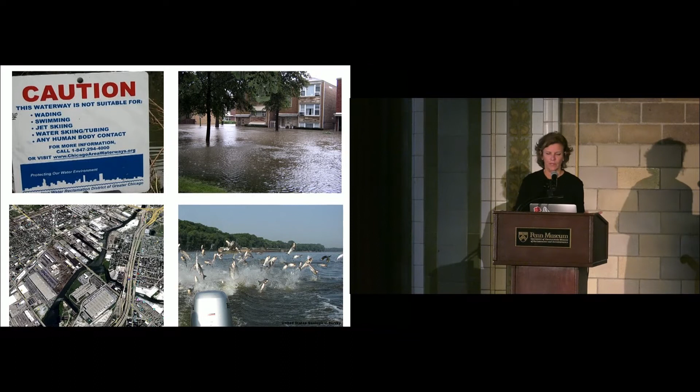So the river has a lot of issues, but it also has great potential. As you can see in the lower left, this former industrial space, privately held edges of the river, could now somehow become a place for the city to make public space or give people access to the waterways. So in Chicago, when we were doing the book, we started interviewing all the people that were using the river, even though it was polluted—people rowing, people fishing, people using it for tourism.

We decided to do a publication that would help the public understand the conditions of the river and see what the future could be if it were to change. So we took these images and, helped by talking to engineers—I think architects are very good at connecting technical information to make it understandable—we showed how the river could one day be disengaged from this reversal, and that our wastewater could be renewed and returned cleaned back to the lakes.

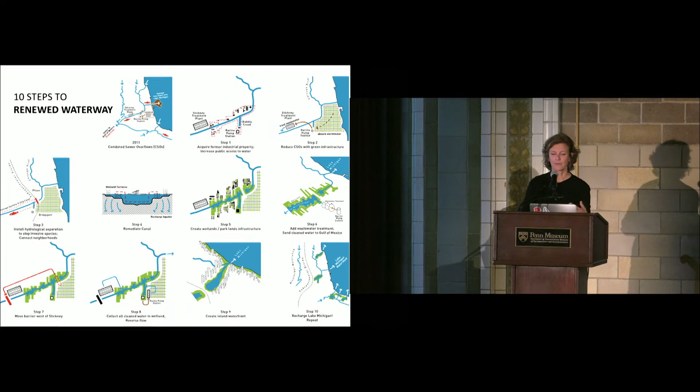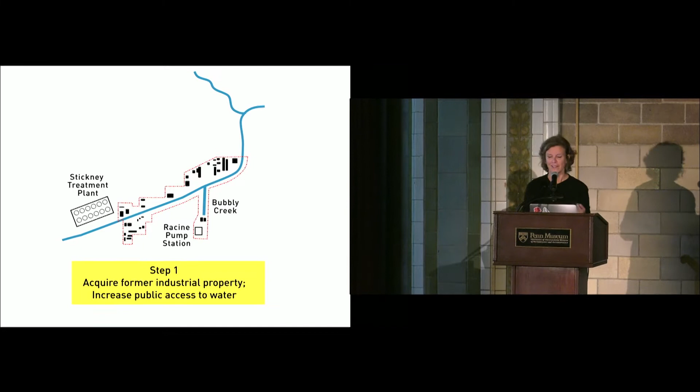In this book, there was a series of steps to follow, and step number one was for the city to get some control along this river's edge and bring it back into public use. The reason being, if people can access the river, that's the only way they are going to be able to care about it.

Sure enough, we got a new mayor in the city who took a look at this book. I think he probably heard it from other people too, but he really embraced the idea of making this river the new recreational frontier for the city. Mayor Emanuel planned 4 new boathouses along the river, and we actually got to do 2 of these boathouses.

And so what really makes me excited is seeing that this once abandoned riverfront is now really an active place for engagement and for youth in the city to be able to use it. For the architecture, it really was important for us to make something exciting, I think.

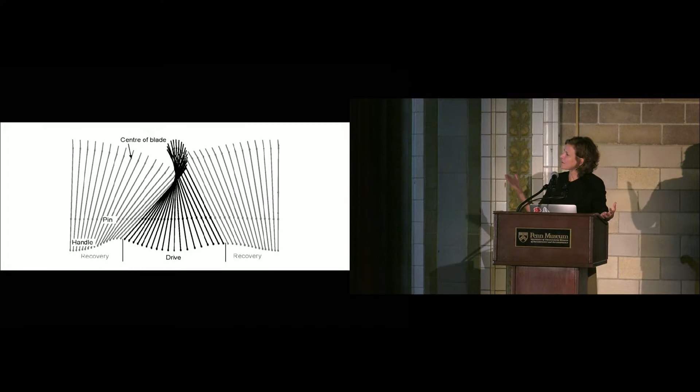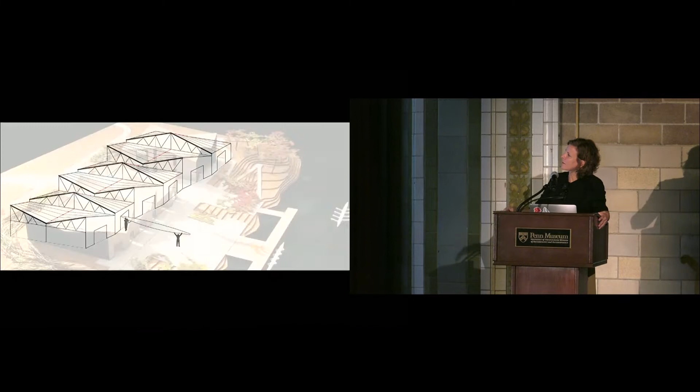We were interested in using the motion of these oars as a prompt. We looked at the whole flow of the oar and turned it into this roof form, using straight members like the oars, but creating this up and down truss system that gives you a really dynamic roof form, but also allows daylight in to warm the space.

And so it's been amazing to see this come alive and be one of the first steps. And now the city is also doing things downtown as well along the riverfront and really trying to turn it into some big asset. I think this could be happening in Philadelphia as well.

One more research trajectory, I think, along the lines of climate. Oftentimes we'll do some of this research and contribute to books. This was a book from Columbia that we were a contributing essay to. We'll come across topics that are somehow not exactly related to architecture but tangent, and then want to follow up on those things, and they kind of filter into our projects over time.

This was really about discovering the work of Marie Tharp, who was an oceanographer. She was working at Columbia, and she had this theory that the ground under the water was almost like mountainous, and at the time everybody thought that was very crazy.

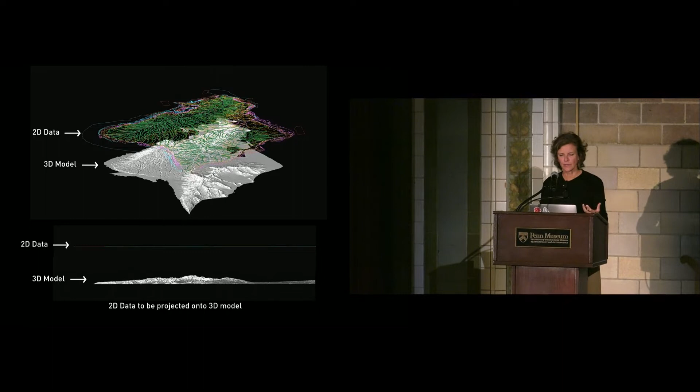One of the projects I wanted to show tonight is called the Arcus Center for Social Justice Leadership. This is a small project that's 10,000 square feet in Kalamazoo, Michigan. There's a small college campus there, and the pink dot is where the building is located.

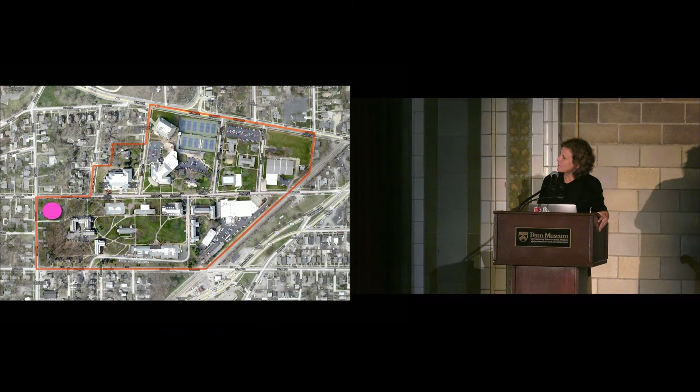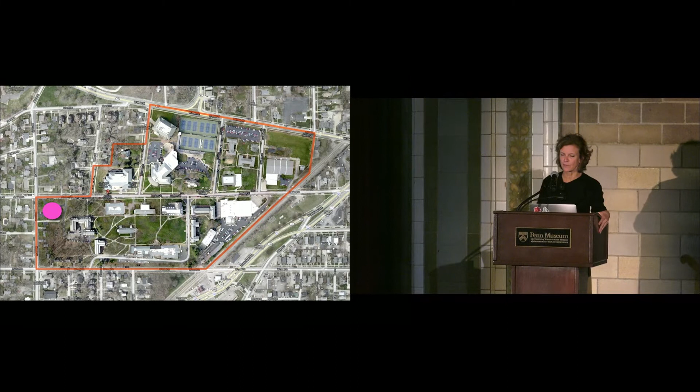They have a strong social justice leadership program on this campus, and they wanted us to design a building that could both fit into the campus but also be the first ever kind of building that's about social justice. The campus has some traditional brick buildings and some maybe postmodern brick buildings as well. But it really felt awkward to try to think about using brick in this case, given the colonial aspect of the design of these buildings, and the client really wanted something new.

Because there was no precedent for a social justice center, we just started to study the space where social justice happens in cities. And what we found was it happens in the streets and the plazas and spaces like that - demonstrations that are a result of so much planning.

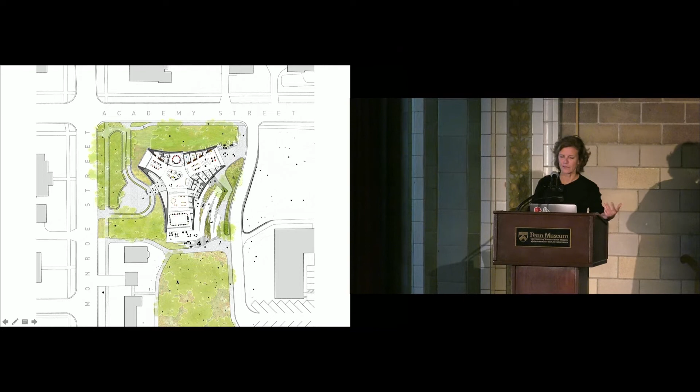And that was something that we heard from all the faculty there. They said what really breaks down boundaries is preparing food with each other, and sitting around a hearth so the neighbors can be invited in.

It really wasn't very easy to get a fireplace, a working fireplace, and a kitchen in this academic building, but because it was so central to this idea of social justice and creating these relationships, we were able to get it through. And so now the space can work for small groups and large groups. They have seminars there, conferences, and faculty spaces for work and classes.

It was really an amazing project to work on. It was fun to try to understand what it means to be a space for social justice leadership. And so we really wanted it to be light and airy, and these are all things that came out of intense research on what social justice could be.

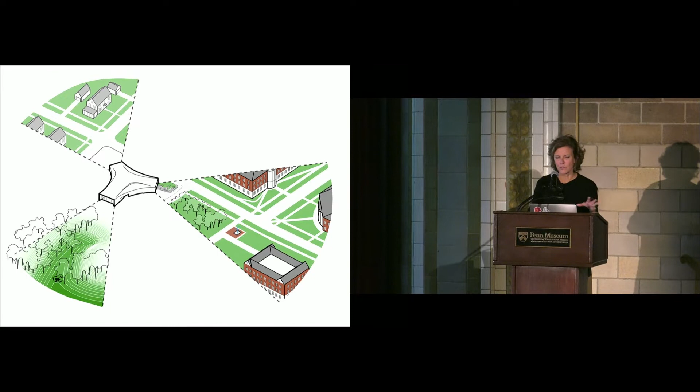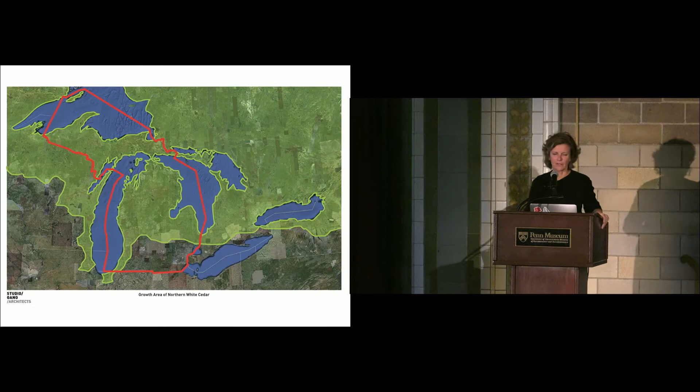These are the views out of the three ends. But one of the things that was interesting in terms of the materiality was as we were driving to Michigan for some of our trips, we came across these amazing forests that are sustainably harvested. This is a white cedar forest—they grow white cedar, which is very resistant to rot and insects.

And we stumbled upon this barn and some other buildings that were done with this incredible wood masonry—some people call it cordwood masonry. And we started to wonder, what if we could revive that technique for this building? Because it really represents this idea of coming together with neighbors to build a structure and a really strong community.

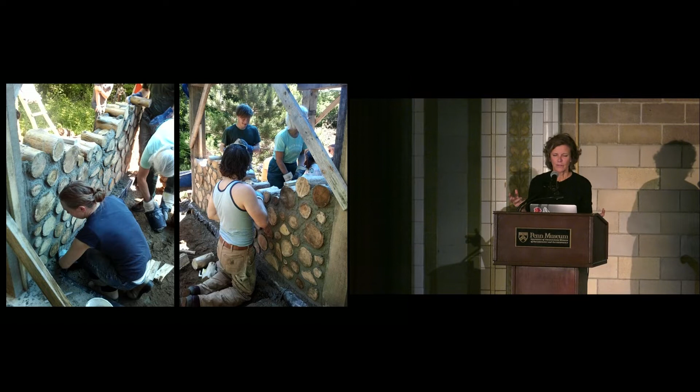Lo and behold, we found this couple, Rob Roy and Jackie Roy, who actually knew how to build saunas out of this technique. They were going around doing little workshops with people building saunas. So we asked them to come and teach us and our contractors and masons how to do a cordwood masonry wall.

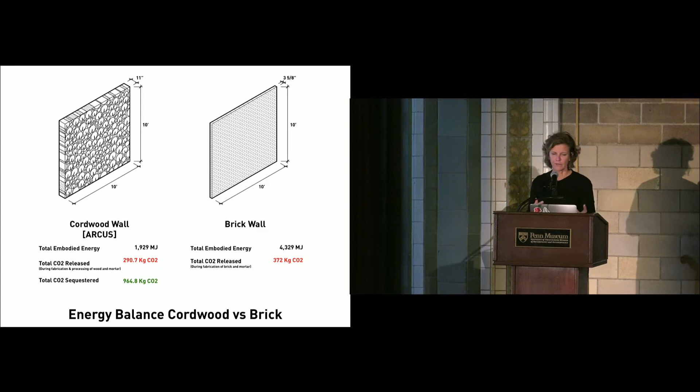The beauty of this wall is that it's really sequestering the carbon. So if you think about a tree growing up, it's absorbing carbon through its entire life. And then what you do is just dry this wood out—we actually dried the wood for a year prior to putting it into the wall. So there's very little fabrication energy put into this wood. It goes right into the wall.

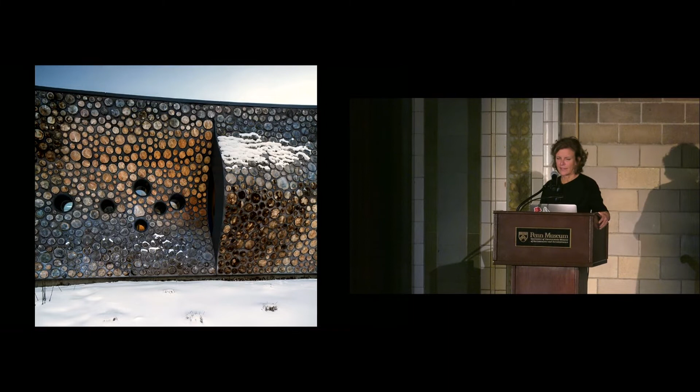Aesthetically, we tweaked it and really got it into this beautiful, almost fabric-like quality. And then you can see here, it becomes a place—it's like taking cars off the road to build a wall like this. So it's a technique that, even though it was old, felt so contemporary, something that could really help us understand how a building could be greener. And it ages too, with beautiful weathering to this material, and it really has a quality that connects it both to the brick campus, I think, but also makes something new.

And now people are really—this campus has really grown in terms of the number of events they hold for social justice leadership. They are really thriving as a school. And it's because of place, that there's a place they can gather, and it's a place that has an identity, no longer having to plan these things in the basement of a school where they used to be. So it was about creating relationships and basing the design on that.

In terms of tall buildings, they're oftentimes thought of as structures that are isolated or sometimes off-putting for community purposes. But we've been really interested in how tall buildings can also create community, because they are really the future—we need to make denser, more compact cities. So how can we encourage community on these tall buildings?

With the Aqua Tower, we were really interested in using the materials, the concrete, in a way that would give a benefit to the apartments and give terraces so people could step outside and even see their neighbor.

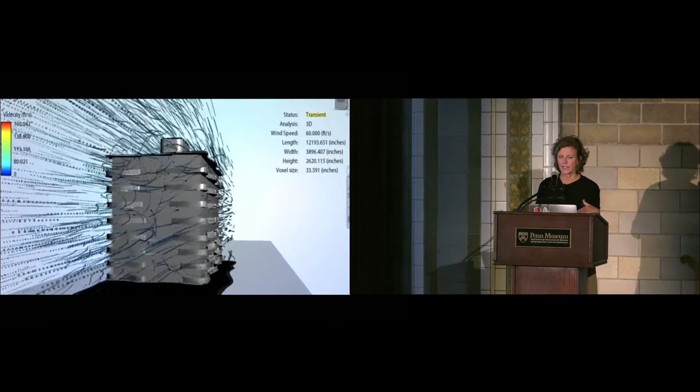We tested this in wind tunnels and found that the variations we were showing in the slabs were actually reducing the discomfort of the wind. In other words, you can use the balcony for a longer period of time in the year.

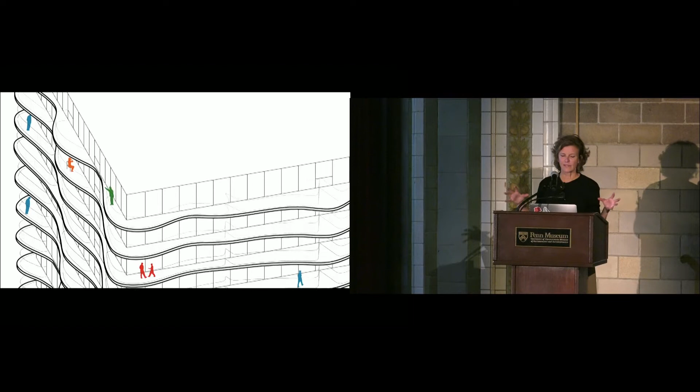It was really based on this idea of using that space outside the building for social purposes, for connecting to the environment, connecting to the neighbors, and not thinking of a tall building as just a stacked place for privacy, which was really the feedback we were originally given.

We said maybe these offsets of these balconies could also allow you to have sight lines to your neighbors. So it turns out that this building really attracts a lot of extroverts, let's just say. It's like people that want to be out in the city. There's a lot of students from the University of Chicago Business School that live there, empty nesters, people moving back into the city.

But one of the things I wanted to do better was the performance of the building. Even though it's a LEED certified building and has pretty good performance, one of the issues is how the slabs could be disengaged from the inside.

So on the next building, we tried to find ways to improve the performance and also to continue to think about the social qualities. Not everyone's an extrovert—some people are introverts—and we wanted to make a building that could be used by both kinds of people.

This building has a plan where on the north side—this is down in Hyde Park, a southern neighborhood of Chicago that has views of the skyline—you have bay windows that you can look out of, and on the south side, a really active balcony structure.

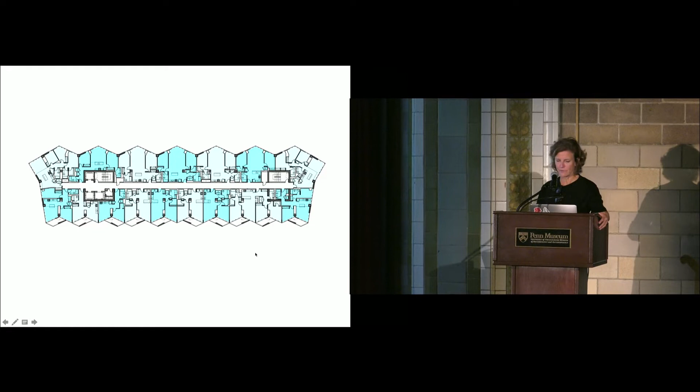So with the tall residential buildings, we've really been interested in how to make them more social. Here you can see the structure of the building.

These offset concrete panels are the columns of the building, but they also allow us to eliminate columns on these bay windows. The slab here is picked up by the panel here, but it's also hung from this panel, decreasing the span and allowing us to go column-free on the bays. The key thing is it is the structure, so it's impossible to value engineer it out.

You can see the detail of this. This building went on a site that was a former strip mall, but now it has co-working space, a Whole Foods market, retail space, and then on top of the plinth there's some social space for the building, and rental apartments above that.

From the south side, you can see these, what we call balcony stems. The idea is that they take the gravity loads all the way down to the ground, but then there's an array of these stacked, almost like cards, stacked up that create this very dynamic outdoor space. You can see in this image the loads being taken down to the ground on the green stem—that's one of the stems.

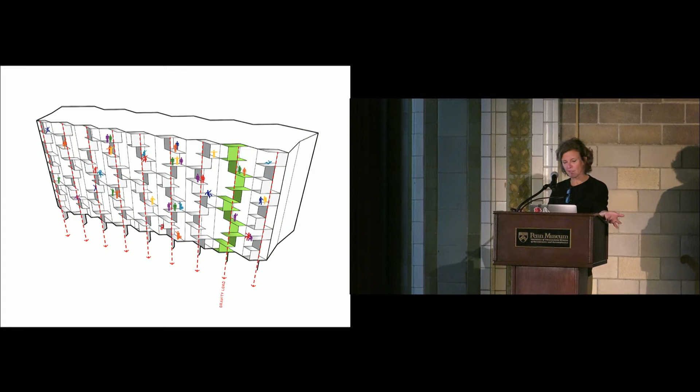What this does is it allows us to disengage the slab on the inside of the building from the slab on the outside of the building, so it can improve performance. That's what we're testing on this building. I'm not 100% convinced it improves the performance that much, but that was the concept.

You can see these incredible, almost Escher-esque spaces that are quite amazing in there. You can't look into someone else's apartment, but you can see them if they're out on the balcony. We really treated this as a kind of threshold space.

Here we're installing the thermal break, which is the first time it's ever been done in Chicago. We were really pushing for that on this project, and luckily we were able to get it installed, along with sensors so we can compare performance—it's when you have a slab inside and a slab outside, to reduce the heat loss.

On the introvert side of the building, this is what it looks like inside—those are my friends, the introverts. And then on the extrovert side, you have these three-dimensional spaces, and people can really hang out.

And you can see people here just going out to the balcony to see everyone else and be seen. It really is a pretty dynamic facade, I have to say.

But this is an ordinary building. It is not an expensive building, just regular apartments. I've always felt like architects need to put our attention somewhat on living space in the city, because it is the DNA of a city. But normally these kinds of buildings are really very basic and not very exciting.

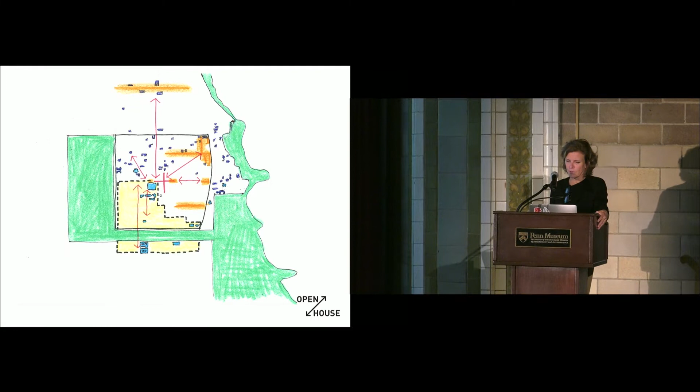And you can see the fabric. There's this beautiful collegiate Gothic fabric, but it's known for being cloistered and not super connected to the neighborhood around it. So the university wanted to change that and start to make a connection to the surrounding neighborhoods.

So we really looked at what was going on in the space and looked around at the existing architecture to find that, wow, there's already all these portals. Even Edward Larrabee Barnes' Smart Museum has them. There's modern portals and older portals, places to enter into the campus.

However, all of them had these gates on them that could be closed down. So what we proposed was a series of slender bar buildings that allowed you to walk underneath and come right into the campus North Commons on grade without any gates, inviting people in from the neighborhood and the public.

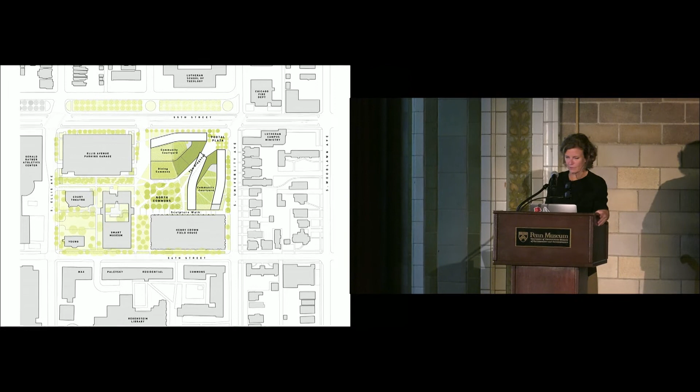And so in scale-wise, there's a big wider boulevard on the north with the tallest building, stepping down to a more residential scale.

So this is the picture of the portal and the plaza that's on the portal, and how you enter now into the campus center.

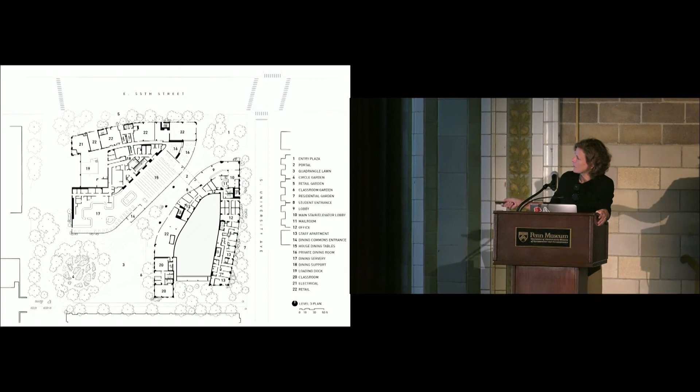And these bars create these little semi-private courtyards above, which is a garden on the second floor where students can have some space that's a little bit more private, but not gated or anything.

So it became a project about these different scales of community, everything from the dining commons itself and these courtyards to places where parents can come and visit, all the way up into these house hubs.

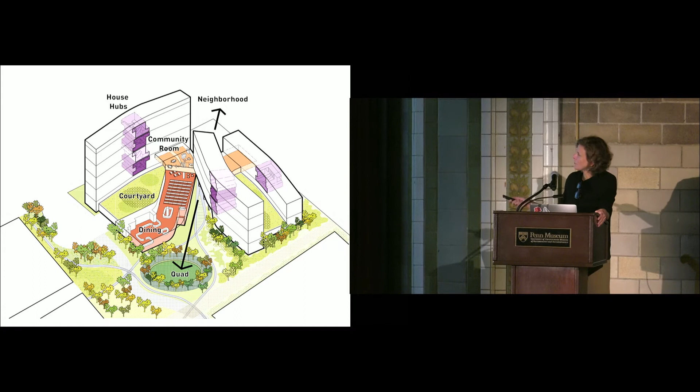This is looking at the portal as you enter into the campus and under these columns. This is the dining commons, which is really almost like Harry Potter-esque with these long tables. But it's also a place that everyone can come and eat.

So people from the neighborhood could come in, the people who work there can eat there, and they do. It's a really beautiful light-filled space with these grill screens that help shade from the sun.

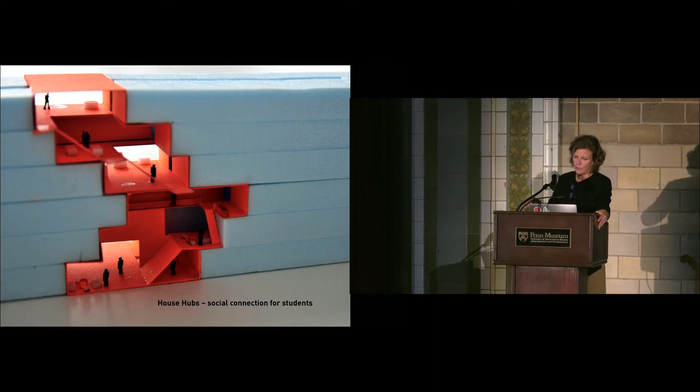So everybody comes in to one entrance for this project, 800 students, and they can either take the elevator or go up the stairs, and then communicate across to any of the towers. But the DNA of the project is really about this house hub idea.

This is the house, showing two house hubs. The idea was there's got to be a space where these 100 students, the university system of 100 students, can get together and create these social relationships. So we created this staggered section, so you have sight lines between 3 levels.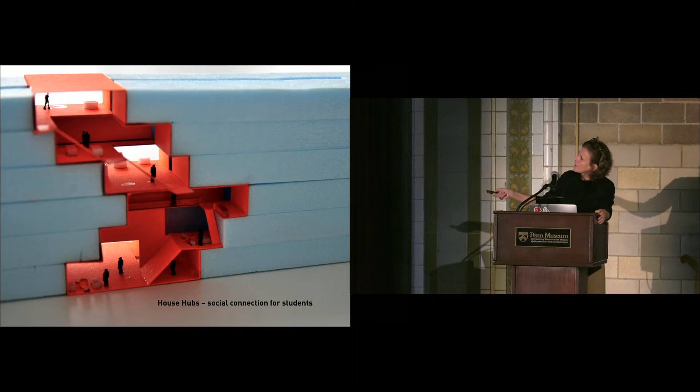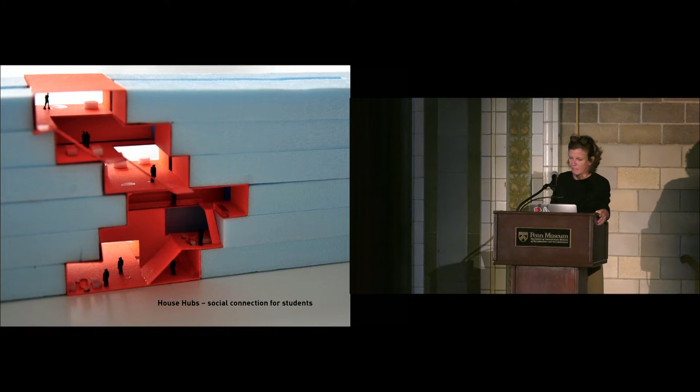It's almost like a townhouse inserted into the fabric of the tower. And that place is where everyone from that house can gather, have study rooms, and cook together.

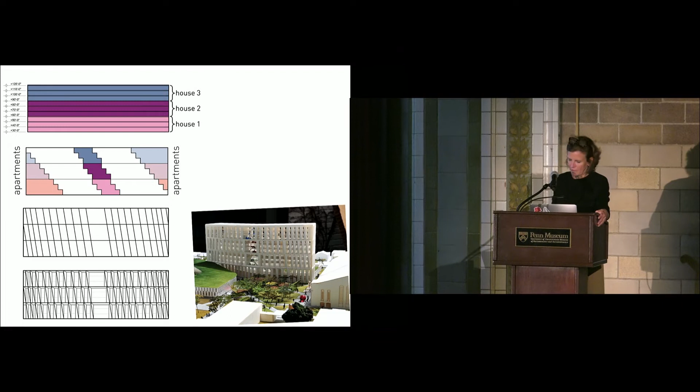And that patterning ended up migrating and informing the facades of the buildings. This is an early model, the model from the competition, and here's another model. And now today, this is the space. Of course, it's really clean because we took the pictures on day one and they had to move in on day two.

Hopefully they have already taken over the space and really made it their own, so each one has a little bit different character.

That will allow people to gather together and bond over the years. We had the idea that the performance for this building is really to have a window that can open 100% and get 100% fresh air in the space. So the grill acts as a safety protection, but it allows you to open all the way up.

We tune the facades based on the orientation. It's really interesting because there's no ductwork here, we're doing a radiant system. It's really energy efficient, and all the students can compete from the different houses on how to reduce energy.

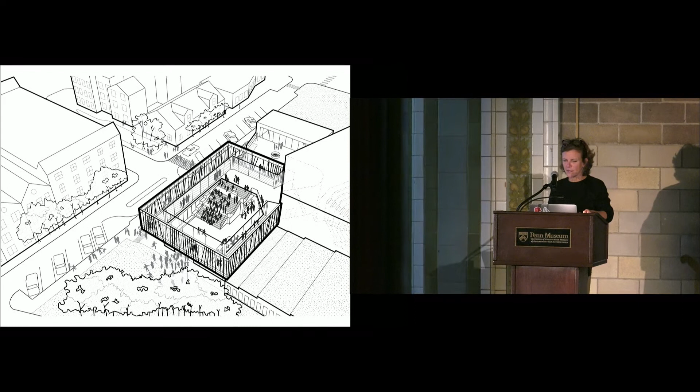So there was some worry about putting a modern structure into Glencoe, but because we landed on this idea of the connection between wood and theater, we were able to convince our client and our community that a space surrounded by wood and plaster would actually be in keeping. So we wanted to use wood in a really new way.

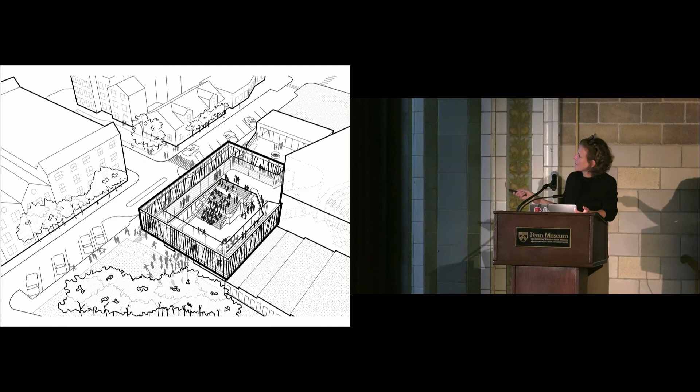We created two venues, and then the lobby is actually almost like this third venue where, after the theater, you can go hang out and talk about what you saw.

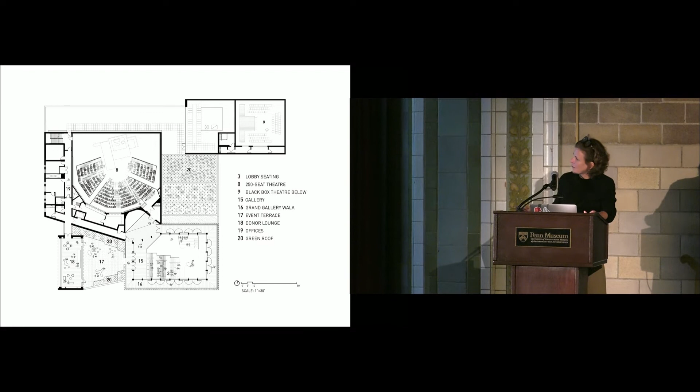So in plan, it's this thrust stage, black box, rehearsal space, and then this lobby that doubles as a community meeting space, a performance space, really serves a lot of different purposes. On the second level, there's a walkabout, similar to what we saw in the inn-yard theaters.

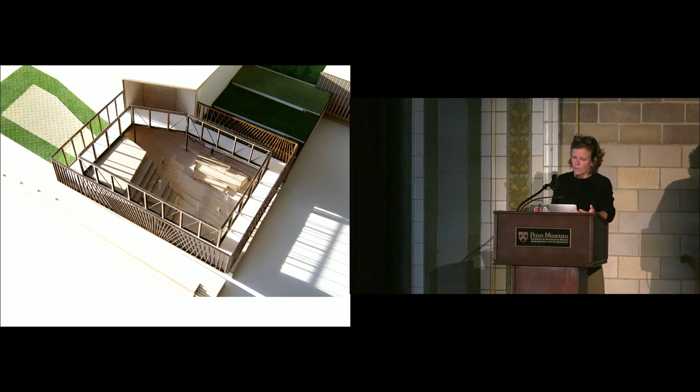Here's some more research about wood construction, and as we moved through the design process, we really wanted to push the limits of new ways of using timber, either in laminated form, but here in tension. Tension makes things thin and light, and it's a beautiful thing to see a structure in tension.

So what happens is these Vierendeel trusses and the wood spanning over the top then hang down, and the idea was to hang this walkway around.

At this point, I realized that the engineer I had was specialized in concrete, and I really needed a wood engineer. And so it just was an incredible way of finding the ecology of the team as well, like who could work together with each other to solve this problem.

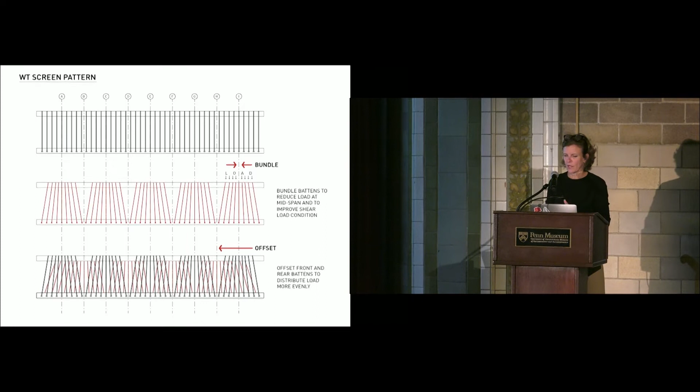Wood was not allowed to be used in this way for the structure, and so we needed to show that it could be done. This is a detail at the bottom we call the cat's paw, and it's a brilliant way of holding in tension. You can see this cavity, adding wood into the strand, the batten of wood to give it more mass instead of putting a bolt through it, which would take away mass.

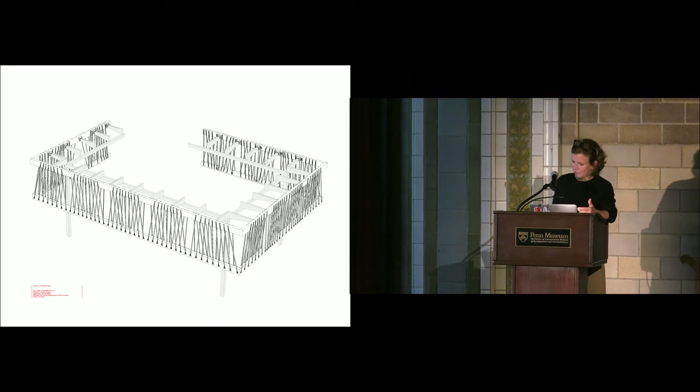We also had to find the people that could do this. I mean, it's not the usual kind of work that you would get from a carpentry shop these days. And we discovered this guild out in the middle of Illinois called Trillium Dell, and this is their site. Some of the work that they do is to disassemble barns and to salvage the wood, and they're really brilliant, a very international group located out here.

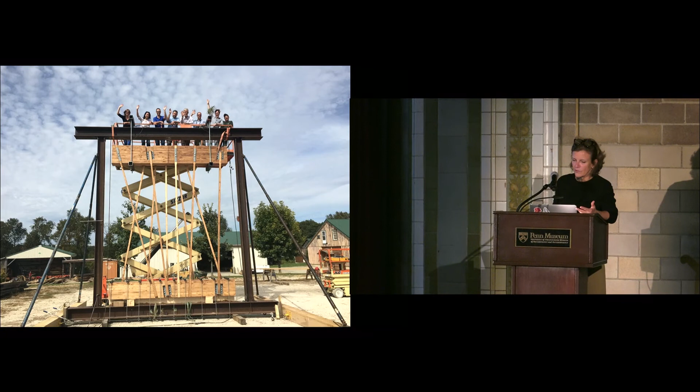And they helped us to mock up and test. So this was like a rig to pull these battens apart, and we were able to show that it could do what it needed to do, and passed the test and was approved to use it in Glencoe. That's the lightweight engineer, Peter Heppel, there, and our team on the rig. The good thing was the wood never broke, and then the rig started to almost break, so we stopped the test at that point.

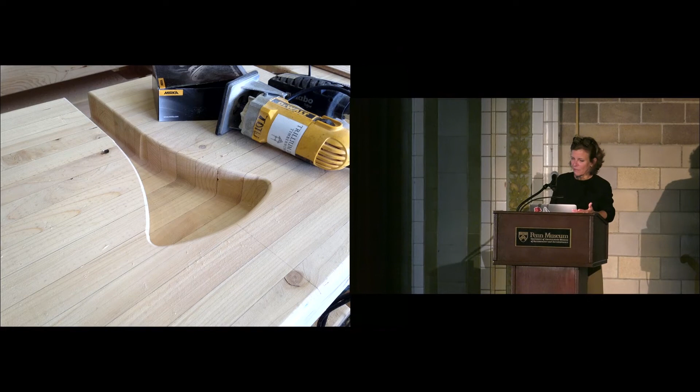Here is the way that the glue laminated wood are routed out to accept the cat's paw, and this shows putting the wood into the cat's paw, into this mold, the flare, which ends up like this. I learned a lot too, and they let us make some of these things, which is really cool to be an architect and be able to participate a bit.

I also learned how to throw an axe when I was out there, because that's what you do for fun in the middle of Illinois in the middle of the winter.

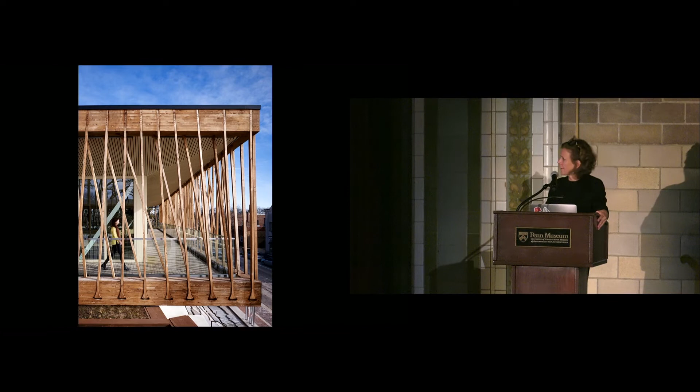Then it started to come together, and you can see the cat's paws coming in, and how this is attached at the top. This had to be straight so you could get the piece in, and you could see and just feel the hanging of this walkway that gives the theater its identity.

Here you can see the other benefit of having the Vierendeels and so on is just how light this all is. There's no additional structure needed because this is all hanging from the top.

So we have these doors that can open up onto the park, and hopefully sometime in the future, the artistic director will be able to do one of those parades, the pageantry that starts in the city and ends up inside.

We used a lot of the wood that was on the site. We did mill that and use that for the interiors. This is the lobby space that you can see, and here it is with the doors open.

We also made sure this space was usable for performance, so it has lighting and is acoustically treated, etc.

And then across from the walkway, there's a kind of meeting space where the ladies' library club can still meet, and there's a rehearsal space, and then this is the thrust stage with the brick that was on the former building on the site, reused to create an acoustic wall with this pattern.

And that was a whole other story that I won't get into, with the masons who didn't think they could do it, and they did it, and they were so excited.

So, the rest I'm going to show just quickly a few projects, not too in depth, but just some of the ways that we're trying to think about each project.

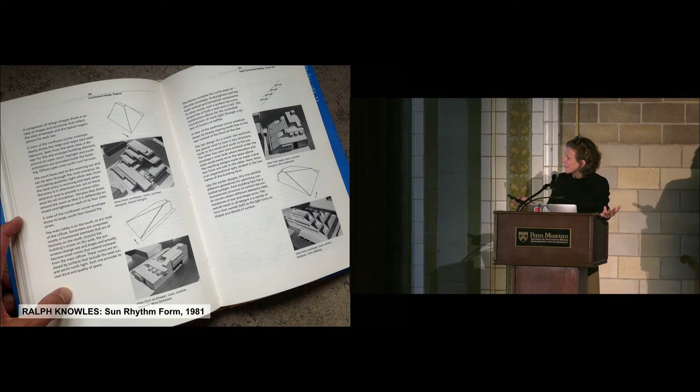Different scales, different programs, and this one is the research for a solar-carved building we're currently under construction in New York. When I was in grad school, I came across this book by Ralph Knowles, who was a professor at USC. I didn't have a connection to him, but I thought the book was fascinating. He talked about how you could shape buildings to make the space around them more comfortable for the neighbors, almost like a solar zoning code that would help shape cities. I just thought it was fascinating.

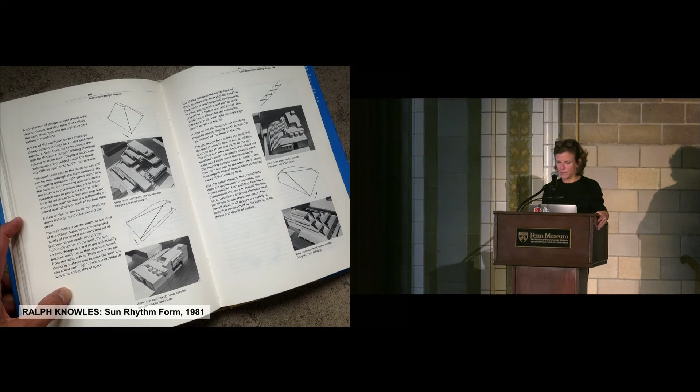I ended up going to a conference, made an appointment, and met with him to talk about this concept. I always had it in the back of my mind, and then we came across this project in New York, and it seemed to apply.

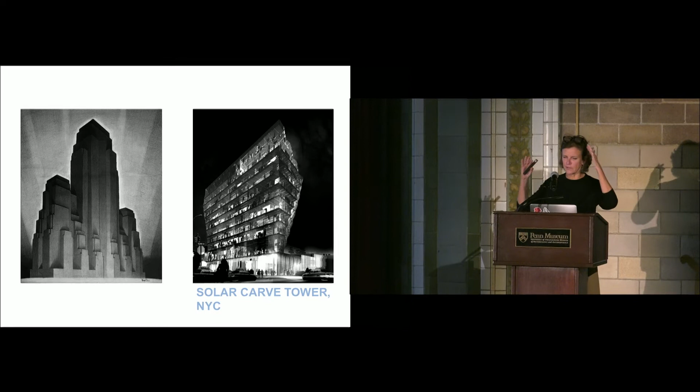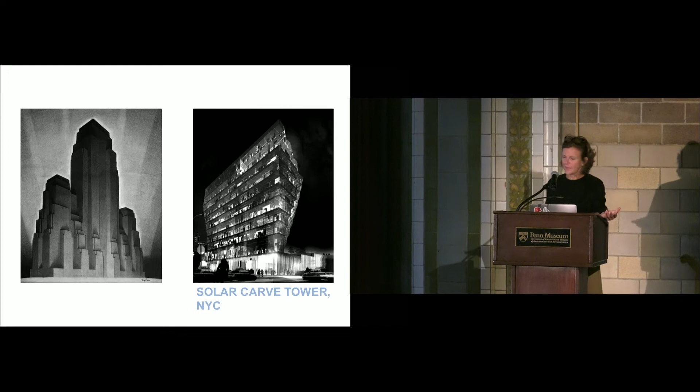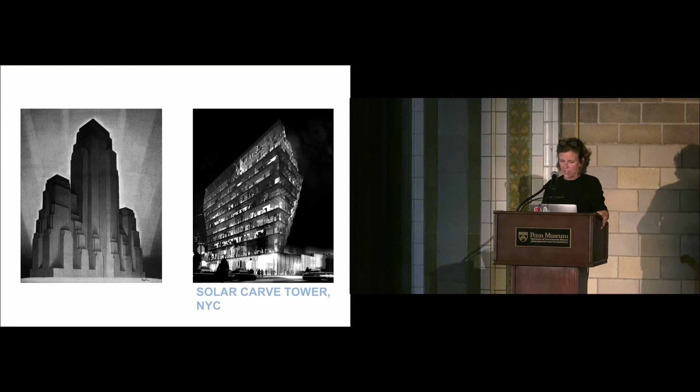This is a 1916 zoning ordinance in New York that determined all buildings would be these step-back skyscrapers. The whole purpose was to preserve light and air to the public space and street, which is really great. This is our building, which when you look at it, you might think looks the opposite of solar-carved, but it's actually designed specifically for its place to benefit the space around it.

In the New York code, you get this zoning envelope, which I'm sure you've seen before, and it produces a certain footprint. Our site happens to be along the High Line, this green line here. This is the Standard Hotel, and it's along the Hudson River in Manhattan.

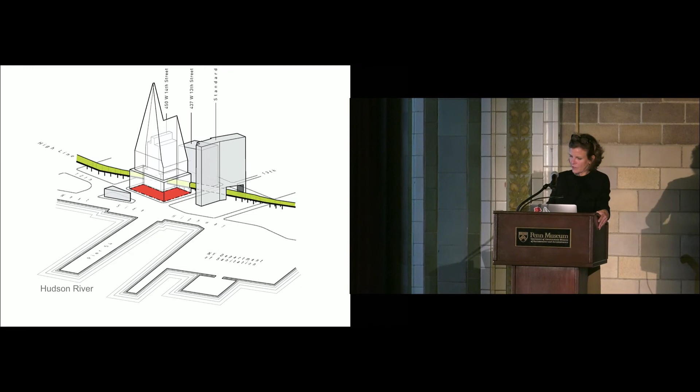If we built as of right, we would be able to do this L shape, and it would really crowd out the High Line, which is interesting because, in fact, it is a public space, but it's unusual because it's in the middle of the block.

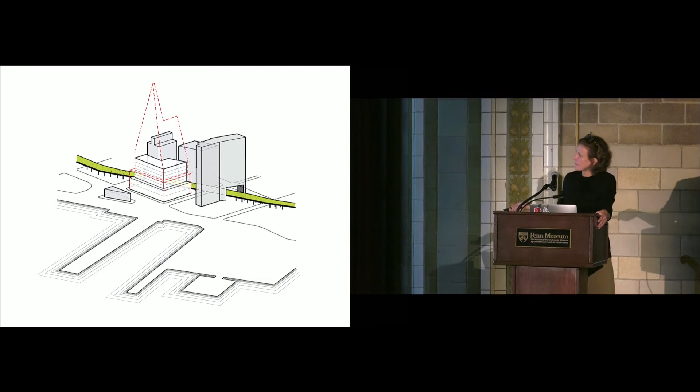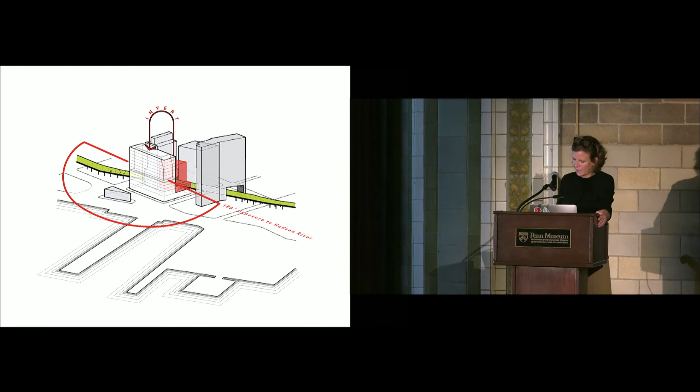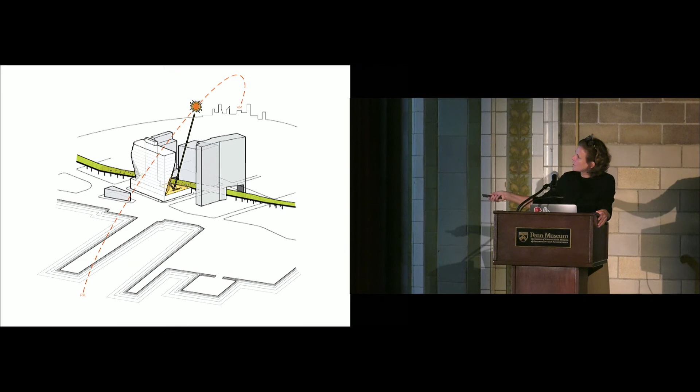So what we discovered was that maybe we need to respect the light and air to the High Line in this case, seeing as our site is right along the river. We went after an idea of removing volume from here, cutting it back and doing a higher building, then carving it with the angles of the sun, so that people walking on the High Line would still have views to the river, and these other carves would reduce the amount of shade on the High Line.

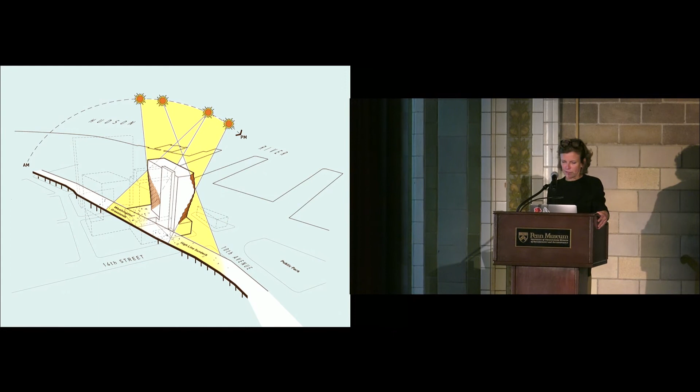By doing this, we're able to preserve 200 more hours of daylight on the High Line during the growing months. When we presented it to the city, because we needed a variance, they saw the logic and approved it. It was really great.

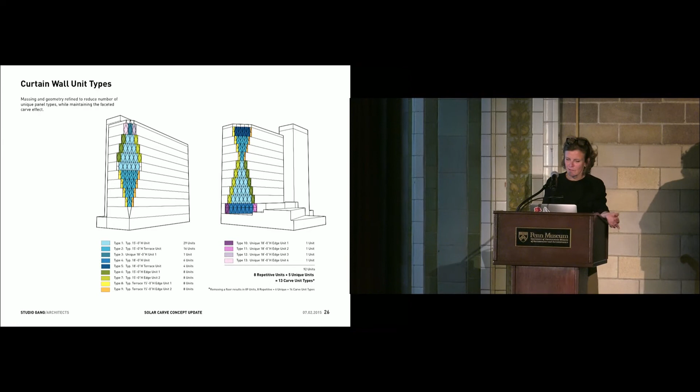We had these different variations - the more we tried to get as much FAR as we could, but if we ended up going down, we would just increase these carves. We're really excited to see this building come around. These are some studies about the faceted portion where we carved out the building to make those areas more special. This is under construction now and should be finished next year, so really exciting.

Finally, I wanted to talk about how the research takes us into areas in our cities to understand relationships between people.

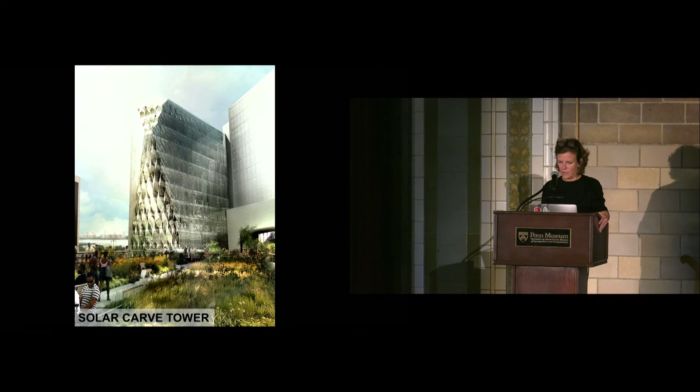This project is the last one I'm going to show. It's really about responding to a couple of things happening around us and wanting to see if architecture could somehow have some positive contribution. We were designing a fire rescue building in Brooklyn, New York, and what I noticed with the fire rescue team and rescue workers is that they always had a very strong relationship to the neighborhood around them. Everybody loved them, and they liked each other too.

So doing the fire rescue building got me thinking about police stations. Why are they so different? Why do they look like fortresses? And also, the terrible confrontations between police and community members are a symptom of something that has gone wrong in the relationship. So we started to think about what a new police station could be, and if it could somehow be different than what we currently have.

We used points that came out of a study, the 21st century community policing report, which had different pillars addressing all the things that need to reform in policing. We took each of the pillars and tried to see if it could become something physical, a spatial element, and if it could be applied to a police station.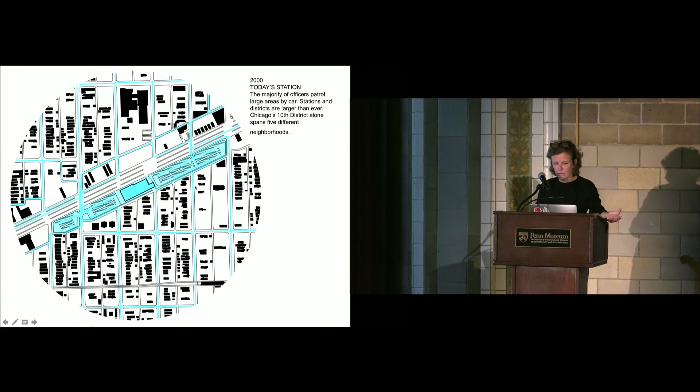This is a diagram of an earlier fabric where people were walking, and this is a diagram of a current police station, one in Chicago in North Lawndale, surrounded by parking and huge roadways, pretty much standing off away from the community. This separation, we think, is part of the problem.

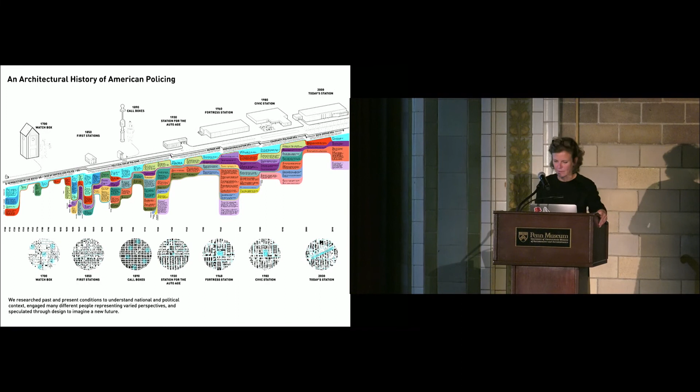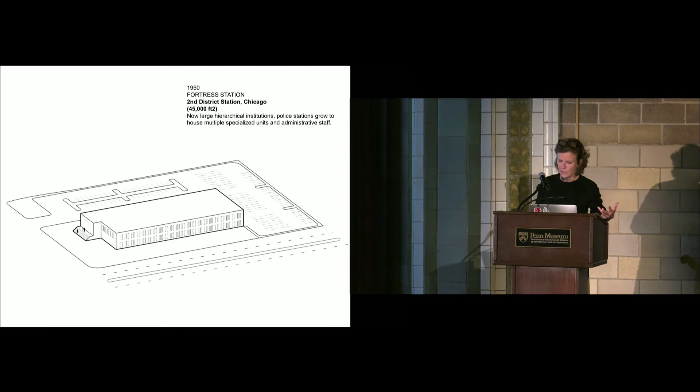This is some of the research we did on the history of policing, which is very complex, especially in America—different in the East and North, from the South, from the West. We focused in on the Chicago station and found that most of them were fortress-like and really kept people away. Fifteen years ago, Chicago started building prototype police stations which were all pretty much identical, but they didn't really ask the communities what they wanted—they just used the prototype throughout.

So when we looked at our site—this is a hypothetical site—we thought, let's test out some of these ideas. We found that we wanted to connect with the community that lived there, but also with the police. So what could they have in common? If we asked them what they would put in their police station to make it possible for police and community members to have better relationships, what would they say?

This was one of the meetings we had, with both police and community members participating, and what came out of it was really interesting. These are architects from our office engaging with people and drawing what they were saying, not what we thought. One of the cool things was people came up with ideas like, if you really want police and community members to talk to each other, we need a barbershop in the space, but also a computer lab for learning. A lot of the stuff was really great.

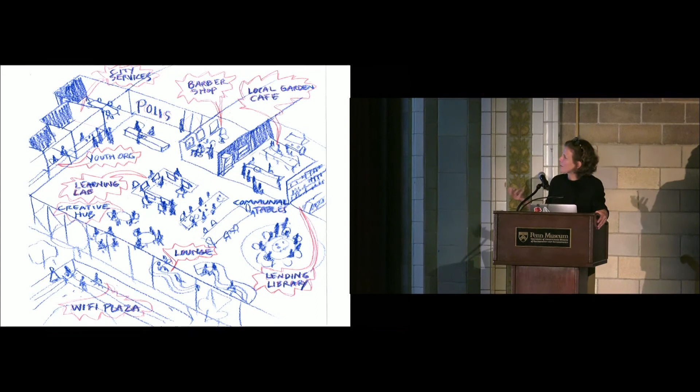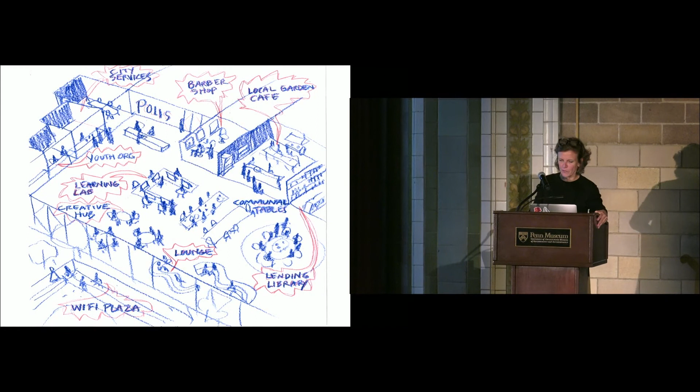Could you imagine having these things on the public side of the station and really starting to create more opportunities for people to meet each other? So you would have a police station going from something like this to having this kind of openness on the public side of the station.

We also applied these ideas to the neighborhood itself. One of the things we found was that both the cops and the kids like sports—that's a good way to connect. They had all this extra parking, so we thought of introducing sports courts on the parking. It was interesting because we were able to raise private money to install and build a half court on this police parking lot in so little time. Everyone was really looking for solutions.

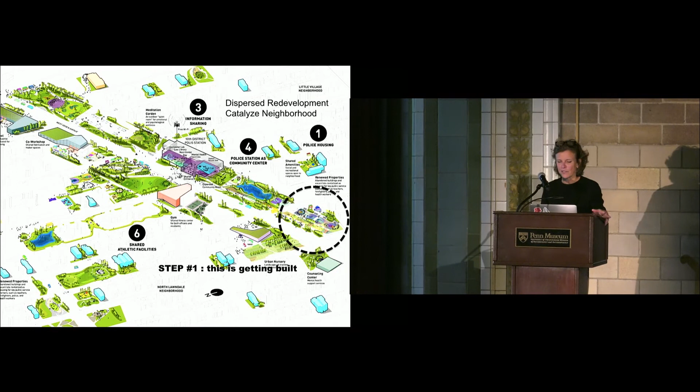When we started out, the neighbors were saying they didn't know if the kids would use it because it's too close to the police station. This is just on the opening day. We went back a year later and asked people, and found out that this court is being used a lot—the cops now have basketballs inside the station kids can borrow, and once in a while an officer joins in. Small steps, but an idea about how to create community and use architecture to build trust.

So in the future, you would go into the station and could have other services—city services. There could be a barbershop, a community room, Wi-Fi, and things that would just make it a public building on the public side of the station.

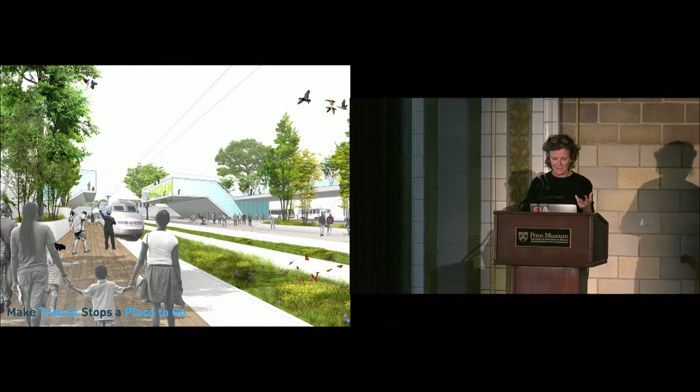So other things I have on the boards to show you and wrap it up: right now we're working on the American Museum of Natural History in New York. It's a new wing—a very important project to bring science and introduce it to youth, all the way up to PhD levels, to get people excited about science.

We're turning a former powerhouse on the Rock River into a new health and recreation center, believe it or not, for Beloit College. We're also working on some taller buildings, residential and mixed-use.

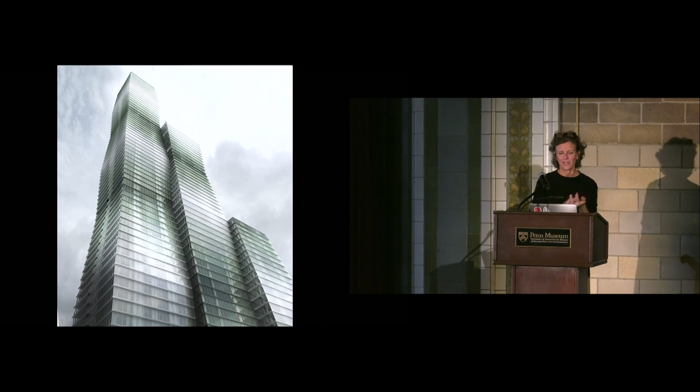This is in San Francisco on Folsom Street in the Trans Bay area. And I've got one building under construction right now in Chicago that will be taller than the Aqua Tower. I never remember the exact height, but the guys in my office always do—it's 1,113 feet or something like that.

That's a really interesting building in that at the base it connects people to the river. We're also doing some work with the Sweetwater Foundation in Chicago, an urban agriculture group in the Washington Park area. And we are working on our culture in our office.

I wish all of my team could have been here tonight to listen to the lecture and join in the conversation, but that's us. Thank you very much.

Thank you very much, Jeanne. That was fantastic. I had the great fortune of going to the Architecture Biennial in Chicago two years ago and saw the Polis station. As someone who has worked in community development in the city, I thought this is amazing. So I'm so thankful that you're here tonight.